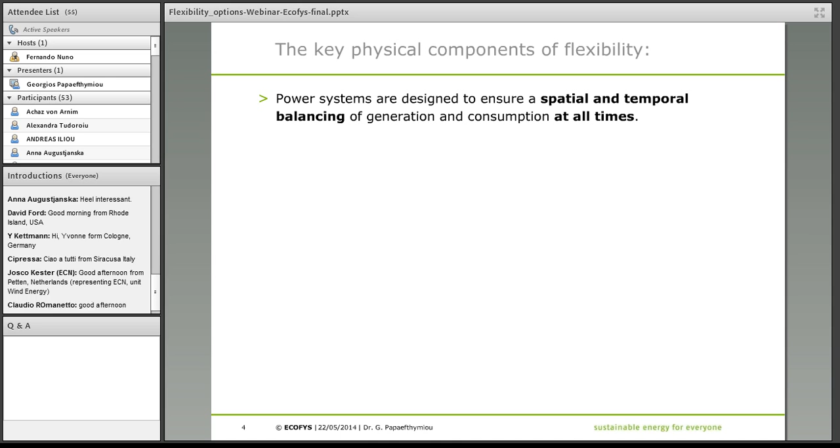And looking at it from this side, we can say that the system is more or less a set of areas that have some demands. The demands are placed somewhere in these areas, and they have different sizes. And on the other hand, we have the electricity supply, and you can also see that supply and demand do not always match in the area where they are placed, and that's why we need networks that come in the middle of these areas and ensure that there is a transfer of electricity in order to match

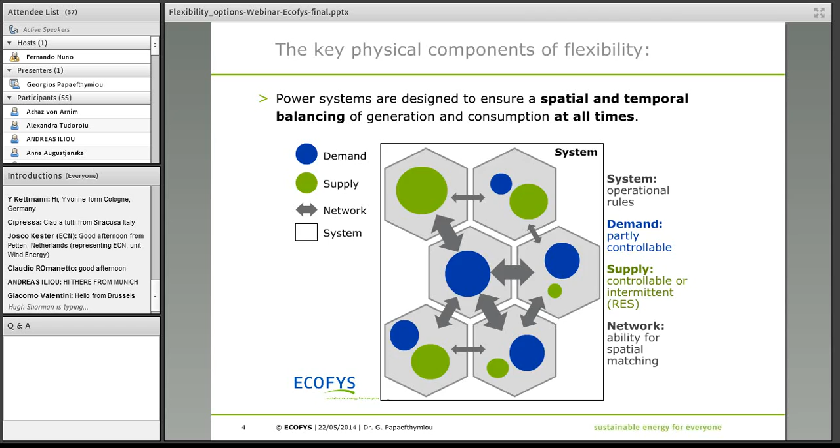and to have this balancing overall. So if we make an overview, we can say that the system actually is the set of all the operational rules, how all this complex situation is operated. The demand most of the time is considered non-controllable, but we could say that it's partly controllable. The supply could be controllable, but now we talk about new forms of renewable supply, which are non-controllable or intermittent. And finally, we have the network, which provides the ability of the system to do this spatial matching. And keeping in mind this definition, we can understand also the key definition of power system flexibility.

And flexibility represents the extent to which a power system can adapt electricity generation and consumption in order to maintain the stability in a cost-effective manner. In other words, flexibility is the ability of a power system to maintain a continuous service in the face of rapid and large swings in supply and demand.

Traditionally, flexibility was provided in a power system by the generation side. And that's why when we talk about measures of flexibility, we were always thinking about how fast our power park can follow the ramps or the changes in the demand. And that's why the key measures of flexibility have always been ramp rates, minimum up and down times, start-up and shut-down times. These are key indicators that we can use in order to understand how flexible the system is.

And further, the power networks have an intrinsic role in flexibility, because these power networks are the key enablers of flexibility. They define the spatial dimension of balancing: how much you can use resources from another area to balance problems in your area.

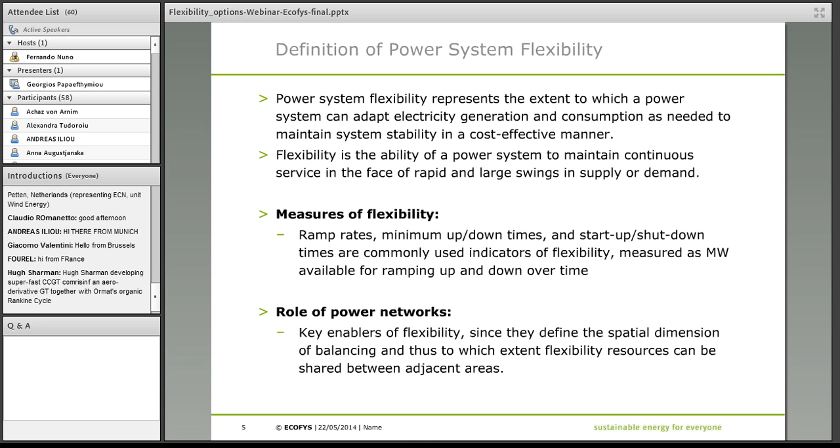So moving on, I will discuss a bit what is this transformation that we are facing and what is the new need for flexibility. And I will start by showing you a typical profile of daily patterns of electricity demand. As you can see, this is a typical demand we are talking about.

This is 1 week. And as you can see, we are absolutely predictable in the way we consume electricity. So we have the 5 first days, which are the days of the week, and the 2 days afterwards, which is the weekend, with a slightly lower consumption. And I would say that this is how the world was, and this was how we designed our power systems until today. And I will try now to show you how is the world of tomorrow.

So if we start increasing renewables, you will see I add a scenario of 20% penetration of variable renewables, what we call wind or solar penetration.

This is a typical scenario that we did for Germany. And what we can see is that depending on when the variable renewables are feeding power into the system, we start to have a distortion of these kind of nice patterns that we had, and a gradual transition towards a shift down of this curve.

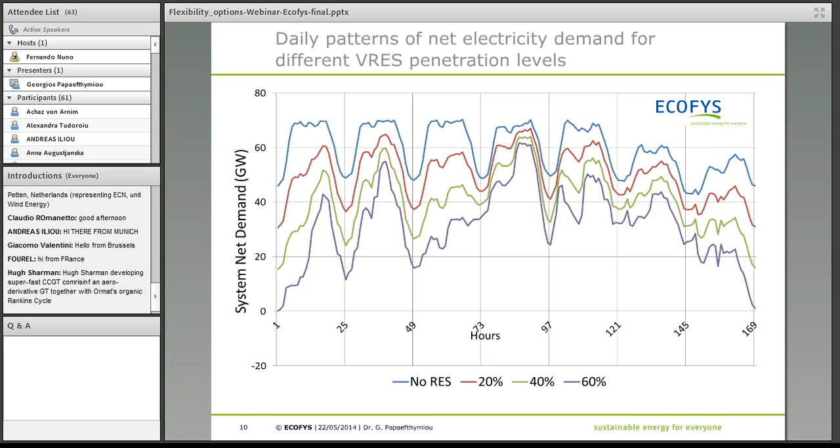Moving to a higher penetration level, we see that this distortion starts to increase, and that we have patterns that change between days. If we move to a more extreme case, to 60%, we start to see this quite strange situation, if you see on the far left or on the far right, that the net demand actually starts to reach also 0 levels.

And if we increase even more, then we see that we can reach situations where net electricity demand, which is the demand minus the variable renewables, will become even negative. And if I isolate the two situations, the nice situation of today where everything is in order, and the situation of tomorrow with high penetration levels of renewables, we can understand one of the key challenges on operation of power systems in the future.

And this is the situation where we will need to operate a system following completely changing patterns and following ramps that you can see are much more steep and follow totally different ways of operation. And this is one of the key challenges that arrive now in the operation of the systems.

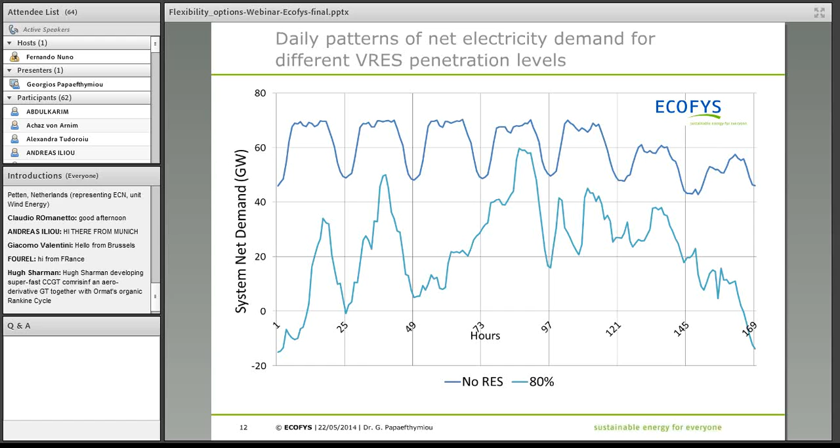So moving a bit closer to looking at what these ramps are, we provide this type of graph, and maybe I can explain a bit how this graph can be read. This is a kind of hourly ramping range of net electricity demand for different penetration levels of variable renewables. And it shows for each point of this graph how many hours of the year we have these

values of ramping. Further, all the values that are above or left of this graph are the time of the year that there is more than this value, and the values on the right side are the time of the year that we have lower ramps than this one.

Now, what we can see clearly from this graph, starting from lower penetration levels, maybe we should just shift towards the left side of this graph, is that when we have low penetration levels, the maximum ramping that we see is around, let's say, 7 gigawatt. The more we add variable renewables in the system, the more the ramping events start to increase.

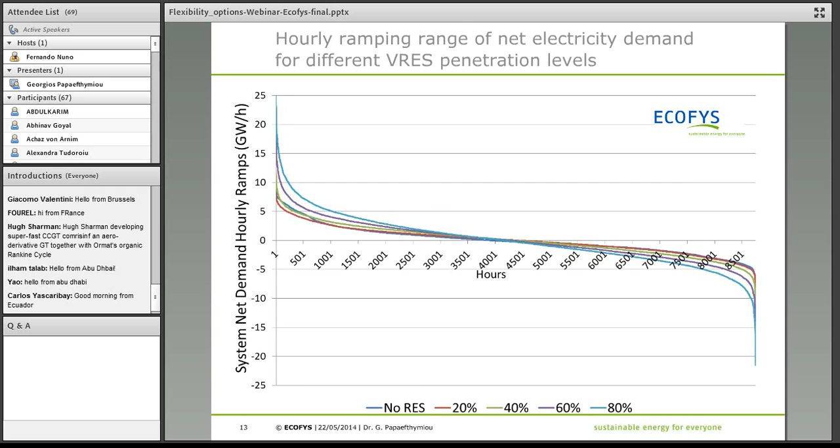And we will show this with an example that we picked up from the operation of the power system in Germany. This graph shows the demand curve. Again, it is a typical demand curve that looks the same as I showed you before. And then you can see with different colors the different power plants and how they supplied the power in these hours. This is a typical week in February 2011.

And as you can see, on the far down we can see the exporting of the system, and this is stable, but more or less limited. Then we have the nuclear power plants that are more or less stable. They cannot change their production a lot. And then we have the more flexible power plants on top of them. And at some point we see with green wind, and with yellow the solar generation in the system.

And what happened in this case is the situation shown here, where we have what we call an oversupply event. So we have a high penetration of wind, and this was combined with a situation of low demand. This was in the evening of Friday to Saturday.

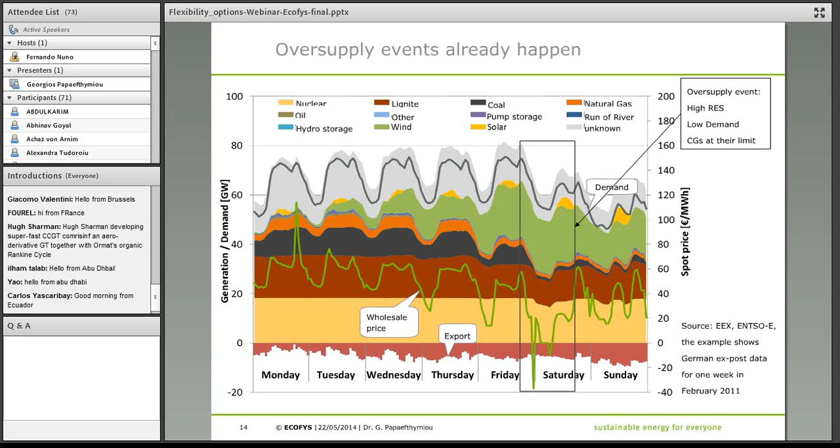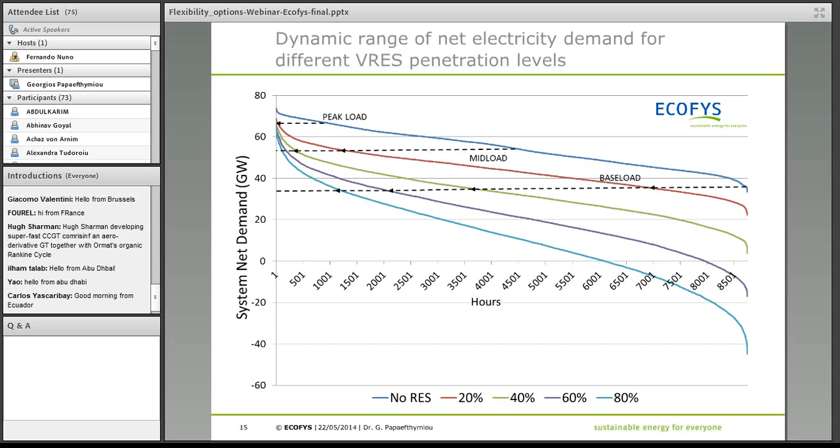This is a direct impact, and this shows that some of these power plants start to face problems with being economic. A direct impact is that several of these power plants, starting from more expensive ones like peak load power plants, will not be able to participate anymore in the market. And this is a second result of introducing variable renewables in the system, that we start to have fewer conventional units in the system that can finance themselves.

And moving to this slide, we can put our thoughts together and understand what is now the new need for flexibility. Looking at traditional power systems, the need for flexibility was to cover small demand variations between days and between hours of the day, and mainly to cover some sudden loss of generation units if a unit goes offline because of a fault. So we would have a variability of demand and some kind of uncertainty of supply. In this traditional power system, the flexibility was provided mainly from the supply side, the power plant fleet.

But with the introduction of variable renewables, we start to see this dual effect. On the one side, we have an increase in the need for flexibility because the variability and the uncertainty of the supply side is increased. On the other side, we see a reduction in the flexibility potential because the variable renewables displace a part of the conventional generation capacity, and this is a part of the conventional capacity that is needed to balance the systems. So a key message is that new flexibility options are needed to bridge this gap.

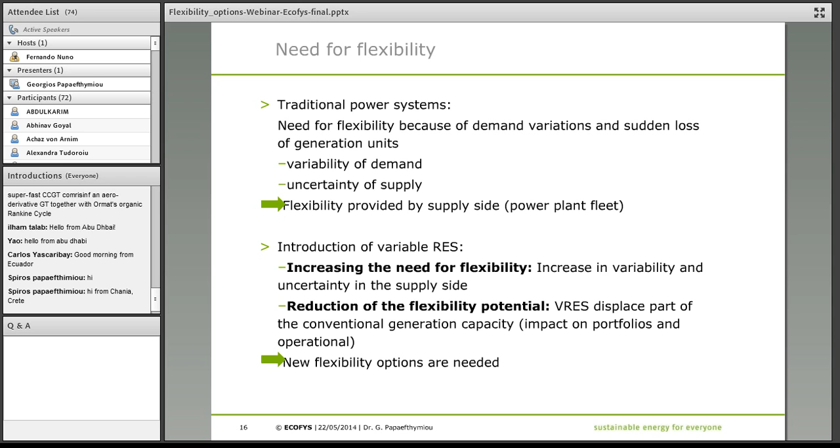Moving on this line of thought, we can see the impacts of variable renewables on what we call the flexibility timeline. This is how the operation of a power system will start to change in the planning. Traditionally, in designing power systems the key question was, do we have sufficient generation to meet the load? This would start with studies years ahead asking how we need to design our generation fleet to have sufficient power plants, until the day-ahead scheduling, intraday and balancing, with the key question, do we have enough energy to supply the load?

Now, when we look at systems with a high penetration level of renewables, we start to see these questions changing. In long-term planning, the key question becomes, does my system have sufficient resources to manage the operational variability? Will I be able to supply my system, for example, with variable renewables between different seasons?

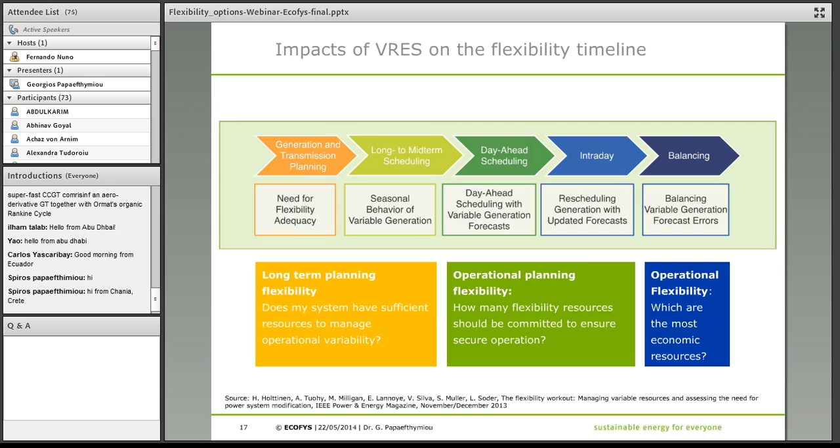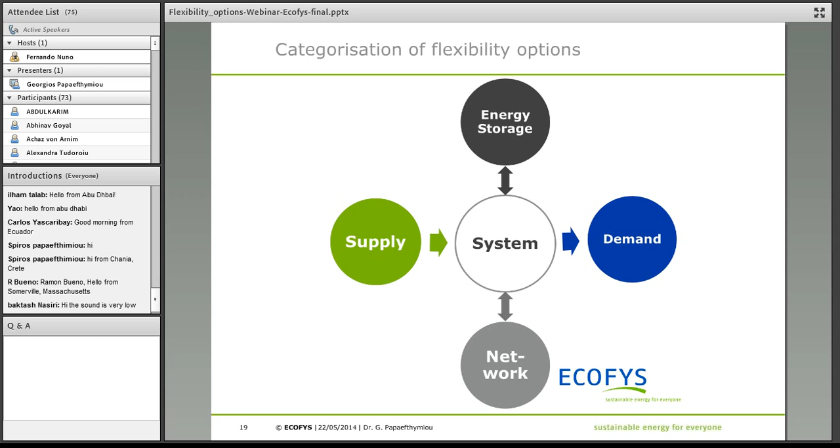And moving from this, we will start the overview of the key flexibility options that we investigated. And on this, we will start with the categorization of the options. And looking at the different options, we should look along the areas of the system. So we identified the 5 key areas, and this is energy storage, demand, supply, network, and the system itself. And we investigated which options could be some good options for providing flexibility in the system.

And this is, let's say, one first mapping. This is the overview of the options that we investigated. In total, we investigated around 20 options. And with different colors, you can see the options that belong to the different categories.

So looking at supply, we would think of flexible coal power plants, gas power plants, oil power plants, biogas, CHP, nuclear, and one new option is actually the active power control of variable renewable energy sources themselves. And on this, it's actually the options of curtailment of variable renewables.

Moving on to energy storage, the key options that we found are traditional pump storage, compressed air energy storage, flywheels, batteries, and of course hydrogen, which is like the power to gas option. On the demand side, we see demand response, and this is a big subject, and we saw 3 different, let's say, areas, which is energy-intensive industries, services, and smart applications.

Electric vehicles and heat pumps, which is actually, let's say, demand that is joining together the electricity system with different sectors, like the transport sector and the heating sector, and also resistance heating, which is still in use in different countries.

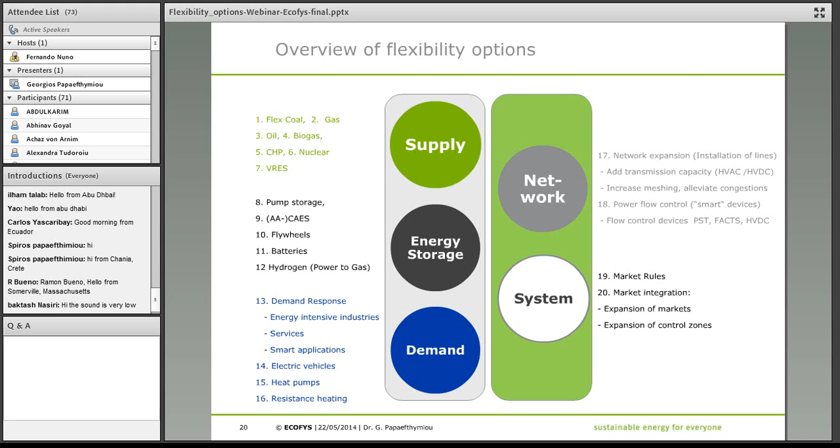Moving further, I will discuss the key characteristics. In our projects, we made the full mapping of each of these options, and this is organized in specific fact sheets. And here I will try to provide an overview of the key characteristics of all these options. And this overview can be given in this graph, and I will spend a bit of time on this in order to let you understand all the information that is there.

So on the x-axis, we can see the different time frames of flexibility. So starting from short-term flexibility, so real operational flexibility that has to do with balancing in terms of minutes or seconds. Then moving towards mid-term flexibility, so flexibility that is needed for day-ahead planning of a system. And then on the far right, the assessment of the technologies concerning long-term flexibility, so looking at months ahead or years ahead.

On the y-axis, we see all the different options that we investigated, especially the options that include storage, demand, and supply. And there we can see the different options in two categories. Red options are options that are mainly small-scale distributed technologies, and bold and underscored options are technologies that are considered to be mature technologies.

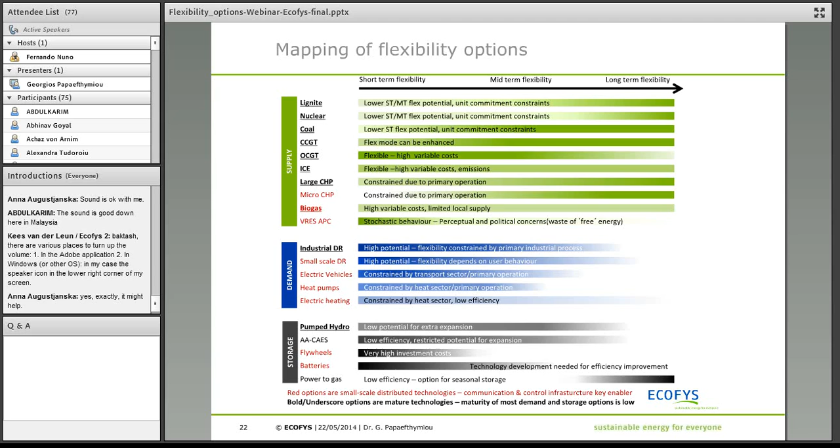So I will move to a short discussion on what we think are some key market barriers, explaining the debate between incentivizing conventional power plants and incentivizing flexibility.

In this graph, on the upper left side, we see the three key technologies and their costs, in euro per kilowatt. Peak load technologies have higher costs, and that's why the slope of this cost curve is higher. Mid load technologies have a lower slope, and base load technologies have an even lower slope, but they have different starting costs.

On the graph below, we can see the effect of how the residual load curves are pushed down because of different penetration levels of renewables. And by looking at how the different technologies will be placed into the merit order, we can understand how the three key technologies will be represented in the final energy mix.

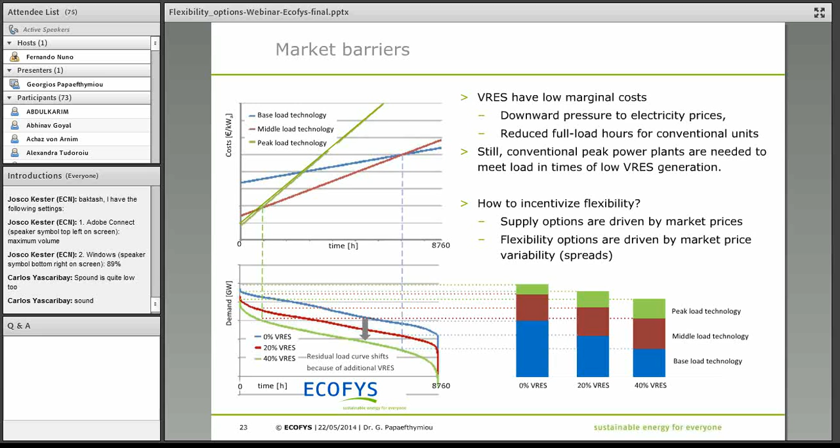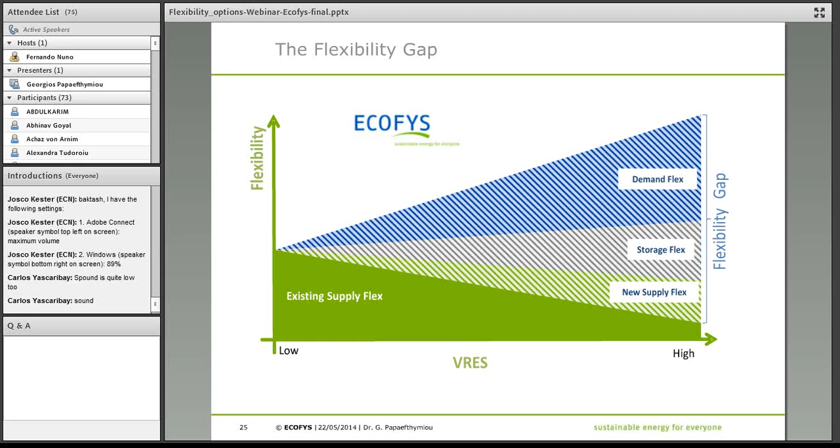And let's say we try to put all the key ideas into one slide. The first conclusion is that this flexibility gap is created by the shift towards a high variable renewable system. This is something to expect. A second key result is that the new flexibility options are distributed options, in demand and storage. And these options require control and communication infrastructure in order to be tapped. Another key result is that controlling variable renewable energy sources is unavoidable for higher penetration levels of renewables.

So it means that in many cases, when we move to higher variable renewable cases, we will probably have a better option to curtail renewable energy than providing flexibility from other sources. However, this is an important aspect that will face a lot of institutional, perceptual, and potential political challenges. And there are a lot of challenges in changing the market to reduce this flexibility gap, and key options like reducing the minimum bid size, or reducing the scheduling periods and the gate closure times will allow more options to participate. Furthermore, we need more incentives and systems for demand-side management. And even though we identified options that are low-hanging fruits, the market needs to be prepared for them.